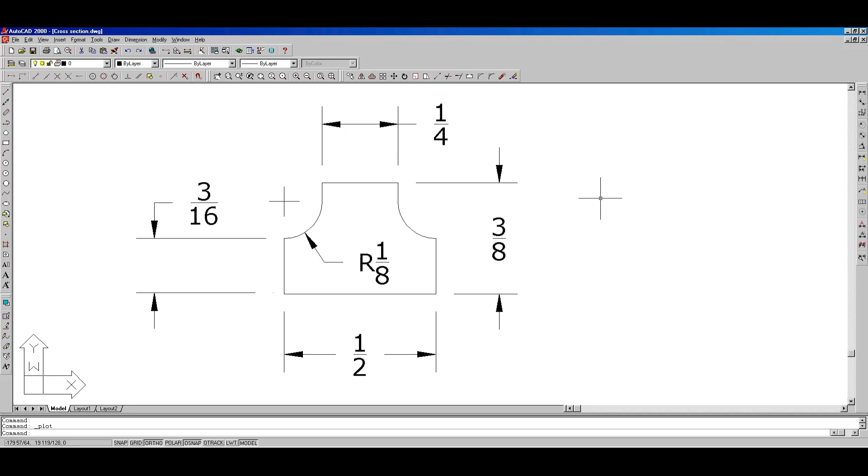So you can see that it's 1/2 by 3/8 with the 1/8 inch radius, and it comes down halfway through the workpiece, and it's 1/4 inch across the top, and that's essentially what I wanted for the cross section of the quatrefoil.

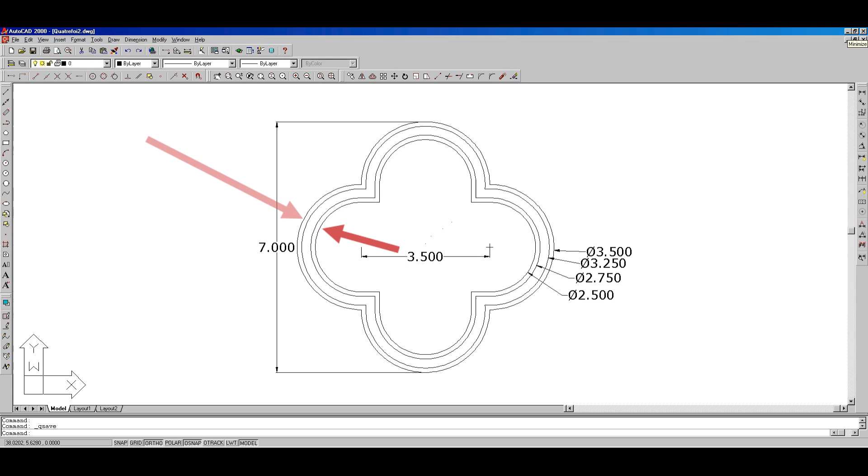Here's the AutoCAD drawing of the quatrefoil, and these are the tool paths. The two lines in the middle, between the outside lines, is the outside edge of the top of the quatrefoil. The other two lines represent the outside edge of it and the inside edge, but they're also toolpath lines. And you can see the diameters of the circles. I got 4 circles that I joined with straight lines to give you this shape. It makes more sense if you saw the drawing in progress, but we're not going to do that right now.

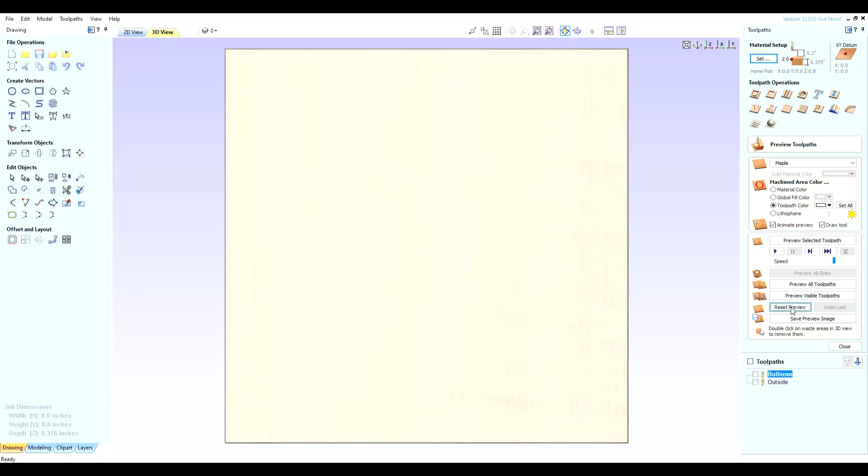And this is my V-carve application used for sending G-code to the CNC machine to cut everything out. And this is the 8 by 8 inch piece of 3/8 inch pine that I'm going to be making the quatrefoils out of. And the first thing to do is the bullnose cuts. Let's run the bullnose cuts so you can see how that works. This is a rather quick rendering of the cutting. There it is. There's the tool paths. And now it runs the cutter.

That was 2 passes. Now the next thing to do is to run the 1/4 inch straight bit, where the center of the straight bit is right on the center of that line, the outside line you see, the outer edge of the bullnose. That cuts the whole thing off at the right place. And since we're going all the way through the workpiece with tabs, it gives us the finished part that we want. So let's go ahead and run the flat bit now.

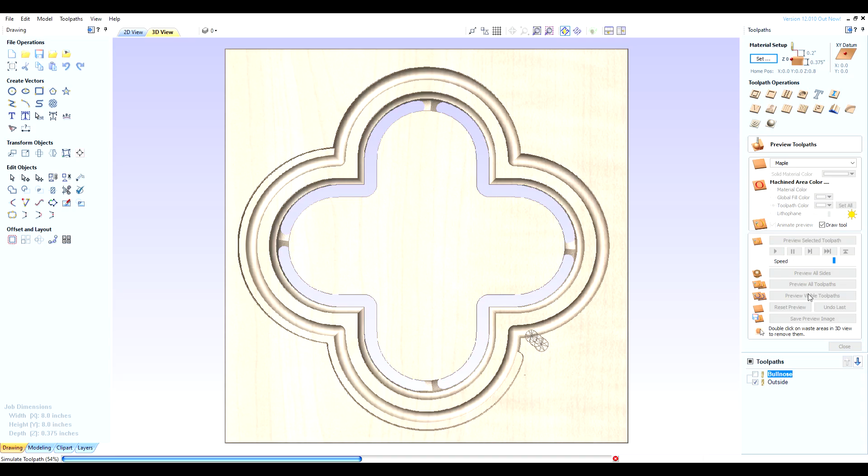This is a bit slower rendering, but you can see it's cutting right on the center of that line. And you see the tabs holding the workpiece in place as it finishes the cut. Boom. And there it is, ready to cut out of the workpiece and put it on the door after a little sanding, of course. Now that you have a general idea of how this all works, not in depth, just a quick overview, let's go back in the shop now and cut out the quatrefoils.

Every CNC needs a spoil board. And why do you need a spoil board? Well, a lot of times, as you can see from this one here, you're going to cut through your workpiece so you have an open slot or open hole or whatever. So my spoil board is 3/4 of an inch MDF, 1 foot by 2 feet, screwed in to the work table with 1/4-20s from the bottom. And this is so you don't put it on top of your aluminum work table. You don't want to be cutting through your aluminum work table like here.

In the spoil board, I have on 1 3/4 inch centers a grid of 1/4 inch holes with 1/4-20 inserts in from the bottom on each one, and that allows me to mount things on here. And in this case, I have these 3 buttons that are down here. They are for squaring up the workpiece, and they just look like this. It's a 1/4-20 plastic knob.

My workpiece, as I showed in the drawing, is 8 inches by 8 inches square, and I've indexed it to the center of the workpiece here. Now, in the software, it defaults to the lower left-hand corner, but you can pick any corner or the center of the workpiece, which I do. So then I can slide it in here, and it's pretty much squared up with the spoil board.

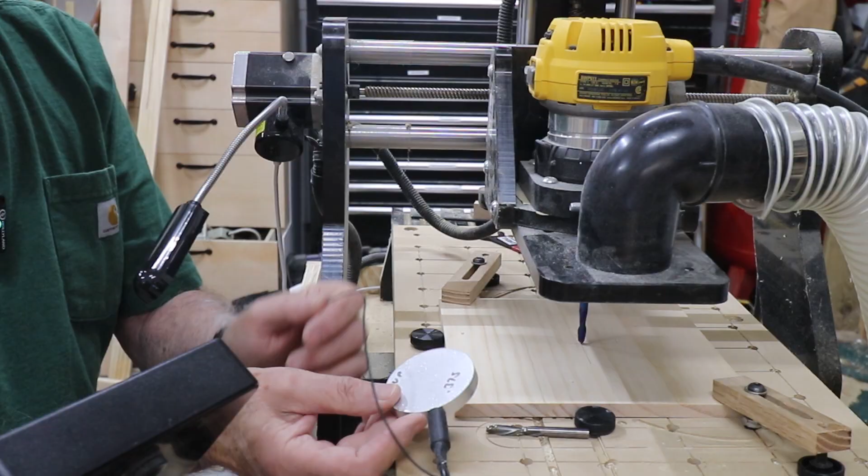Now, to give the computer a better idea of where it's at for doing this kind of work, I have a touch plate. This is a touch plate. I'm going to raise this up, collet here, set the touch plate, and go to plate and OK. See if it's there. It is. Now it'll come down until it touches a plate, then it'll return back up again a little bit.

That's now fixed. If I move this up and down anywhere I want, I just hit my zero and it comes right back to here. So that's ready to go. So, goes in this little pocket right here. Click OK. Now for my next trick, I will have to get the dust collector on here. Well, I have to raise this up. It doesn't matter because it knows where it needs to be. So come up.

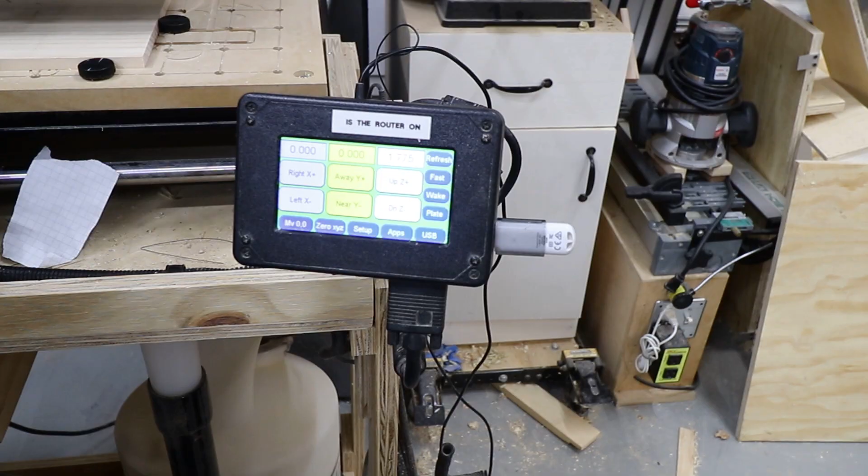Now I would run this with a camera on here so you could see it, but there's plenty of videos showing that. And the other side of that is keeping the dust from going all over the shop. So let's go set this up and run it. Now hoping this shows up on camera with the buttons I push.

I go to USB, which is in place. I have a tap file, which is basically the G code. It goes for the bullnose. And I go to next. I'm not going to use that virtual zero function. Hit start, and everything's on. It should be on. Yep. Hit start, and it's going to start the dust collector and the router and start running the job. It's going to be noisy. I'll start the job. We'll come back when it's done.

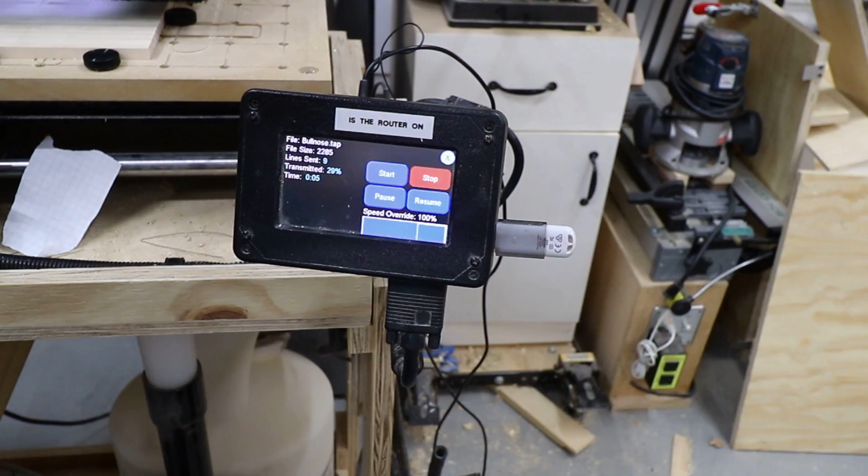Okay. Looks to be about done. So let's get out of this, go back to the main menu, and go up, oops, and away, and then near, and let's pull it out of there. I can see places where it didn't go all the way through, but that's to be expected. So I only set the cutter to go, I think, about 10 thousandths below the thickness of the workpiece. I should actually go about 20, I think.

So yeah, I've got to do some cutting and cleaning. Not a big deal, but let's take a look. So there it is. You can see that it didn't go all the way through in some places. I think you can see that, and it's very thin. That's not a problem. I can just knock it out of here. But then I got to do some sanding on the inside and the outside, and I'll show you the finished product in a minute after I take care of all of that. But let me knock this out of here, and then we'll have number one done and ready to go in the door.

And there we have it. 2 quatrefoils, 1 for each door.